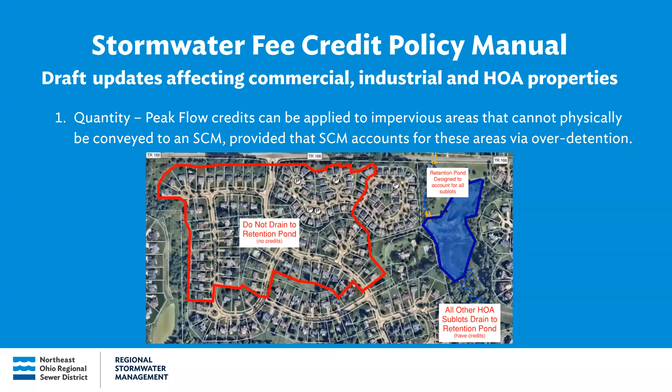So this is a little bit of a change here, but we want to acknowledge those that are paying into the maintenance of that stormwater control measure, just trying to give folks some more credits as they pertain to them.

All right, another update that we have. So currently we have industrial NPDES quality credit that allows companies to get a 25% credit for complying with their permit. We will be copying that program over to service municipalities that have MS4 NPDES permits.

So currently public buildings like city hall, service yards, police stations are exempt from the stormwater fee, but there are some self-sustaining building uses such as pools, municipally owned daycares, or rec centers where they are not exempt from the fee. So what we're looking to do is make those uses eligible for the quality credit, through the MS4 NPDES permit.

So if you have any questions about this or any of the other changes, please reach out to Chris Hartman. He'll be able to address those questions.

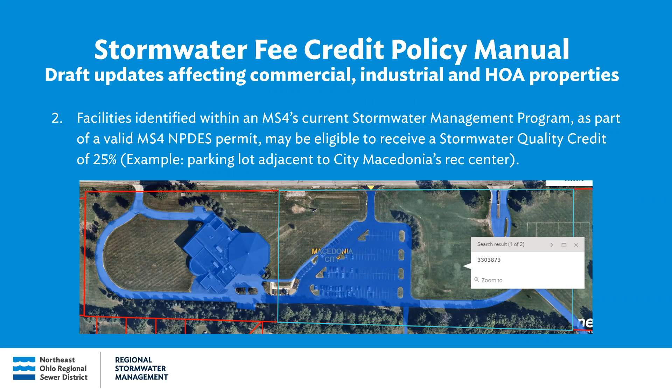So just a couple of other updates to the policy. Credit eligibility will require an applicant to at least have partial or shared maintenance responsibilities for an SCM. This wasn't the case before, but we wanted them to have some skin in the game, if you will. So we're going to require that partial or shared maintenance for the stormwater control measure.

We are also going to be adding an expedited credit application process for stormwater control measures that are funded through the Green Infrastructure Grant Program, just trying to speed up that process as they're submitting a lot of that information through the grant program already.

Credit renewals. So we're going to limit the dates on some of the credit renewals from May 1st through December 1st to ensure that SCM inspections can be completed during favorable weather. We don't want an inspection to come due in January when it's snow covered and we can't really see how that stormwater control measure is functioning. So we're going to try to align those with better weather for those inspections.

And then there's various administrative updates to provide additional clarification for those that are reading the manual. If you have any questions on any of these changes, feel free to reach out to me, your other watershed team leaders, or Chris Hartman.

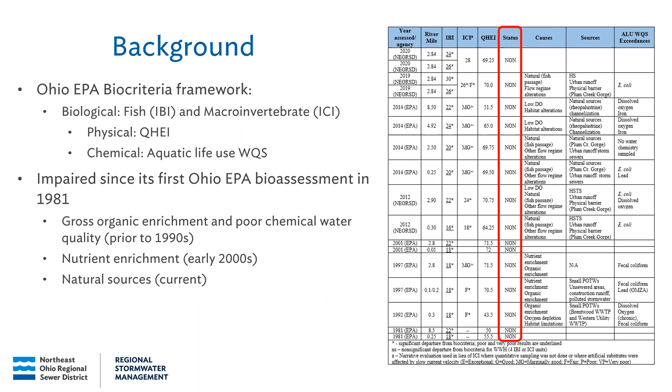So how do we get all that cleaned up in Plum Creek watershed? Well, the organic enrichment portion was really taken care of in large part due to the sewer district. In 1983, we started planning our Southwest Interceptor expansion, which is a really large sanitary sewer. It collects all the local sanitary sewers and brings them over to our southerly wastewater plant in Cuyahoga Heights.

So when that Southwest Interceptor finally went online in 1997, it took 3 wastewater treatment plants out of commission: the Brentwood, the Western Utility, and ODOT Park 339, a total of over 500,000 gallons a day of treated wastewater, which really wasn't treated very well. Now it's out of the watershed completely.

There's currently 1 wastewater plant remaining, which is the Plum Creek wastewater treatment plant, which has an average design flow of 0.04 million gallons a day. For comparison, our southerly wastewater treatment plant averages over 100 million gallons a day. The nutrient enrichment portion of the impairment was really taken care of by Ohio EPA and partners.

So when a stream is impaired for nutrient enrichment, Ohio EPA creates a total maximum daily load, or TMDL, for Plum Creek specifically in 2001. What that did is it made the Plum Creek wastewater treatment plant report their nutrient effluent, what's coming out of their wastewater plant, and put limits on them. In 2019 and 2020, monitoring by the sewer district showed that Plum Creek is now meeting all of those total maximum daily load target criteria that Ohio EPA put in place back in 2001.

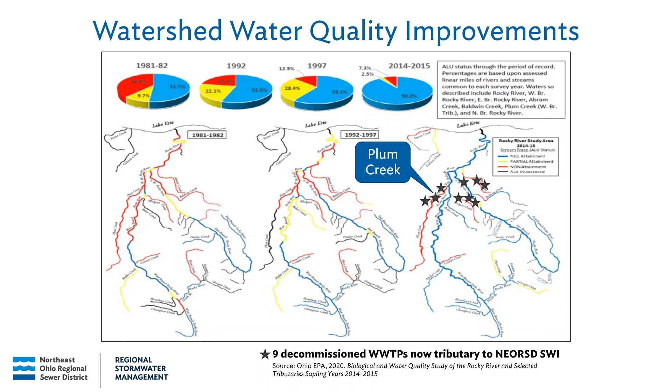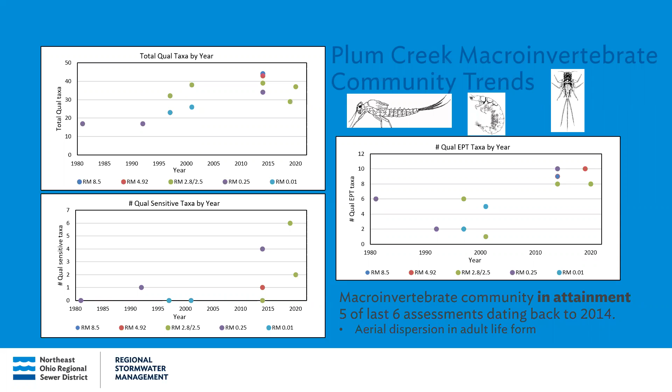Now, the second half of that water quality standards is the fish community. Fish are a little different than bugs.

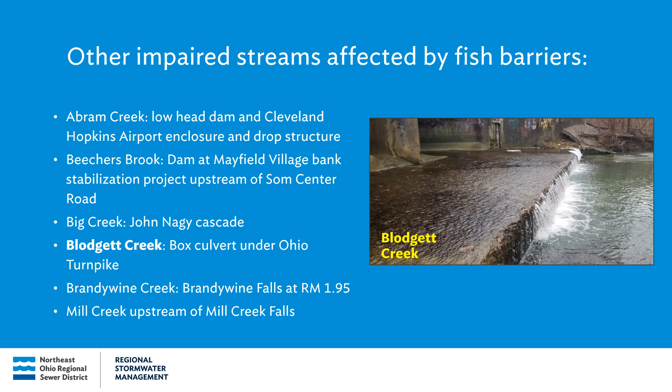I do not see any posted. All right, thank you, Keith.

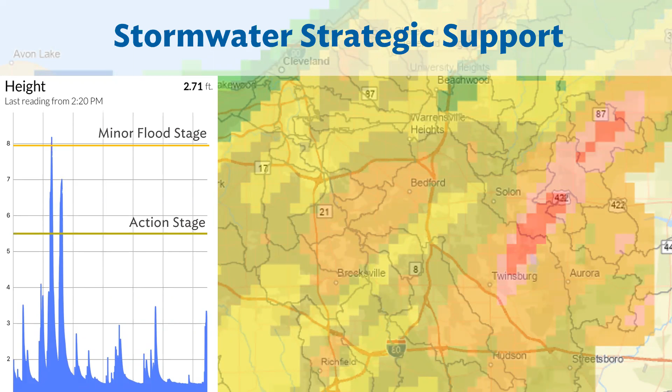So you've heard us talk about in other WAC presentations some of the steps that we take as part of our urgent storm event response. Related to the different types of data, we have an array of data types that we use, and we'll be talking about those here in the remainder of this presentation. First one is obviously rainfall. We have two different types: rain gauges — our district rain gauges and other rain gauges — and then our gauge-adjusted radar rainfall, which covers not only the area in our stormwater service area, but what also drains into it. We'll be talking about that as well.

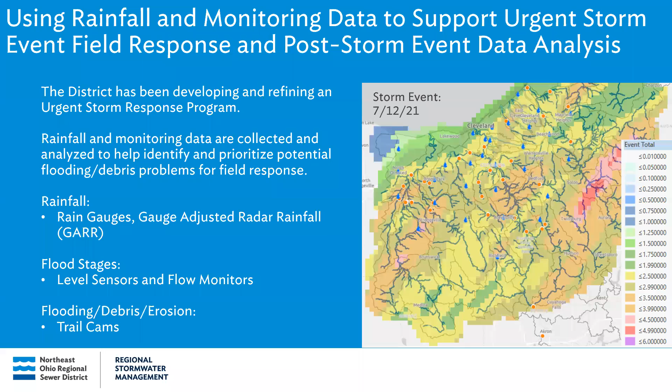A number of different level sensors and flow monitors that we have, both from the USGS, our district, and then an external vendor that supports us as well. And then we also have a series of trail cams that collect photos that we can turn into videos to support us with both debris, flooding, and erosion. Next slide.

With the district gauges, we now officially have 30 district rain gauges scattered throughout our service area. We collect 5-minute data time steps of rainfall amounts, and we've created a tool to quickly extract that data and summarize the peak rainfall amounts for a series of durations, ranging from 5-minute to 48-hour.

We then compare that to a couple of different reference recurrence interval sources. The first was the Huff and Angel Rainfall Frequency Atlas of the Midwest, which prepared recurrence intervals between the 2-month and the 100-year. The more recent NOAA Atlas 14 has recurrence intervals from 1 year to 1,000 year.

The example on the left shows a table of the 30 different rain gauges and the peak rainfall totals generated, compared to those different sources. For example, the bottom rain gauge from Westlake had relatively mild peak rainfall amounts, meaning a small intensity storm event between 5-minute and 1-hour. But for the larger period, the peak 12-hour and 24-hour met the 5-year recurrence interval, indicating heavier rainfall.

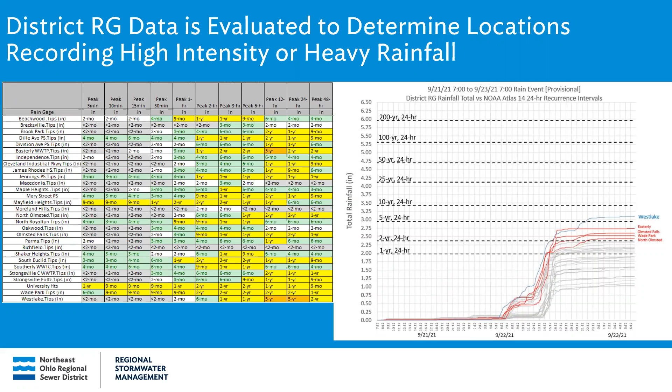Similar to the district rain gauge data, since mid-2016 we've been collecting gauge-adjusted radar rainfall data, or GARR data. It covers a little over 1,300 square miles, broken into 1 kilometer by 1 kilometer grids, translating into 3,410 grids, collecting similar 5-minute time step data.

We use that data similar to the district rain gauges, compiling it and looking at peak rainfall amounts to get a sense of what kind of storm occurred where, helping us identify high intensity heavy rainfall events.

This is an example of the July 12th, 2021 event, showing the peak 30-minute rainfall totals for the service area. The orange areas indicate heavier rainfall, darker green is lighter, and clear areas didn't meet the 2-month metric.

There's an example on the far left where some orange grids happen to be in Plum Creek, the same sub-watershed Justin told you about, indicating high intensity rainfall amounts. It just so happens we have a USGS stream monitor there on Plum Creek, shown in the upper left figure, and the levels actually met flood stage, which we then used to send out a field crew to assess the flooding situation.

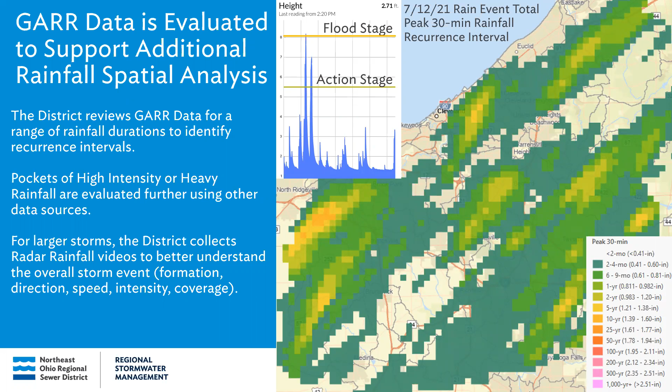Regarding monitoring data, we have 80 different stream monitors located throughout the service area. About 40 of those are USGS stream monitors, and we also have some district monitors installed, along with an outside vendor that's also been installing a couple dozen monitors throughout our service area.

For each of those, if we can, we take a look at the online data to understand where we have flooding and use those flooding indicators to send field crews to assess the situation. Based on the severity of the flooding, we might prioritize where we would go first versus other locations.

One thing I really like is how the National Weather Service has defined 4 different types of flood stages, shown on the bottom left: action, minor flooding, moderate flooding, and major flooding. The action stage reflects when water has reached a stream where it's about to get out of its banks and access the floodplain. Minor flooding indicates perhaps a local road has been overtopped. Moderate flooding indicates some buildings have been inundated, as well as some roads. Major flooding indicates a significant area is now underwater with several buildings and several roads.

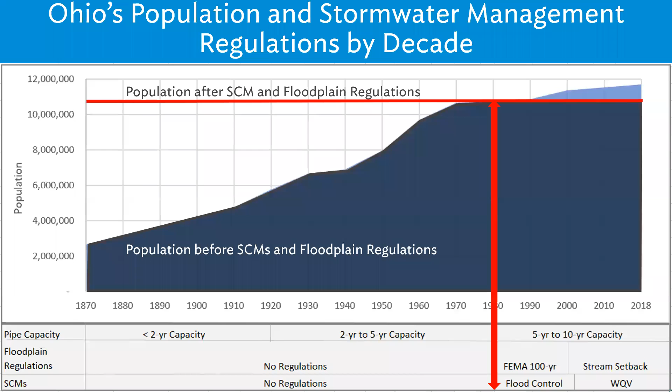So in order to support some of the analysis, the community originally had some locations that they wanted to put some detention basins and asked, as part of this request, how would this help mitigate some of the flooding in the area? And did the district have any other suggestions? And so based upon our existing model, where it loaded different catchments and what kind of pipes and streams were in the model, we realized we had to do a lot of additional extension into the local system. In order to understand those challenges with the storm sewers and the stormwater control measure potential locations, we decided to do a fairly significant extension in the local system. By doing that, it'll help us better understand these local flooding problems the community was trying to resolve, as well as some opportunities to mitigate those problems.

And so the table on your right gives you an idea of the number of model catchments the original model had, and with this update, how many additional model catchments we provided. So we went from 76 catchments to a little over 1,000. And the catchment size on average was 33 acres, which was actually a very good level of detail, but we extended it down to the catch basin level or the parcel level in the non-residential areas because of the types of solutions we thought would be most beneficial for this area. From a modeled conduit segment, we went from a little over 50,000 lineal feet of pipe modeled to nearly 250,000 lineal feet of pipe modeled. And to give an example of what that looks like, the next couple of slides can help explain that.

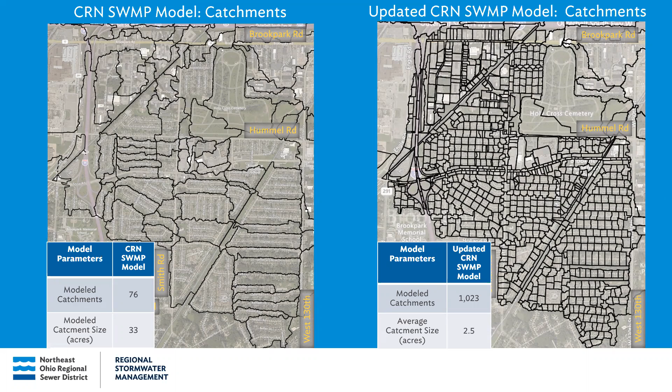And since the community had very good records of the different drawings, anytime we found any areas where it looked like we needed assistance, they were able to quickly find those and share those with us. So it was a very good coordination effort between us and the city to try and get all this information in. Next slide.

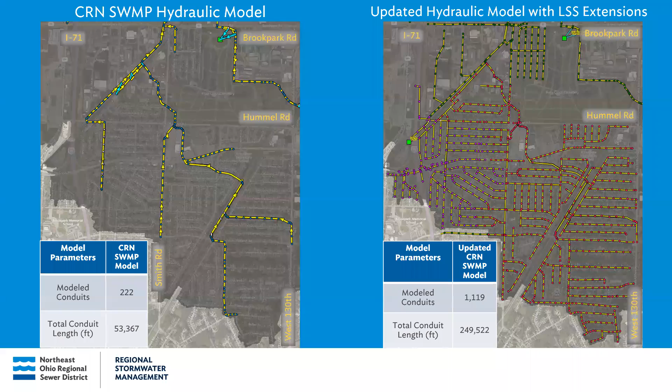So right now we have 3 different monitors that are currently located in this portion of the service area, collecting data and using both the district rain gauges and gauge adjusted radar rainfall data. We're currently nearing the end of our model calibration. And from that, we'll define the different problems and then different types of solutions.

And as I mentioned before, since this area was generally developed prior to stormwater control measures, with the challenges of this area being very flat, very impervious, and having poor drainage soils, it looks like the storage alternatives are going to be the most beneficial to this area. And there's 3 general types that we're looking at. The first one are some conventional inline basins, which are the ones you typically think of. But in order for those to have the best application, you need to have enough elevation so you can allow ponding without causing problems in the upstream areas.

Another option is the conventional offline basins, but in order to do that, you need to have enough area that you can divert the water from the streets and storm sewers. And once again, with a very developed area like this, there's limited areas where you can do that as well. And the one that seems to have the most application and probably the most benefit, but also might be the most complicated and costly, is decentralized underground storage or bioswales.

But with the imperviousness that we have and with the public right-of-ways that we have, it looks like these might have the best application. And once again, that's one of the reasons why we went to such a high level of detail. So as we proceed with these different alternatives, and we'll share these with the community, this might be a good thing to give you an update on at the next spring Watershed Advisory Committee. Next slide.

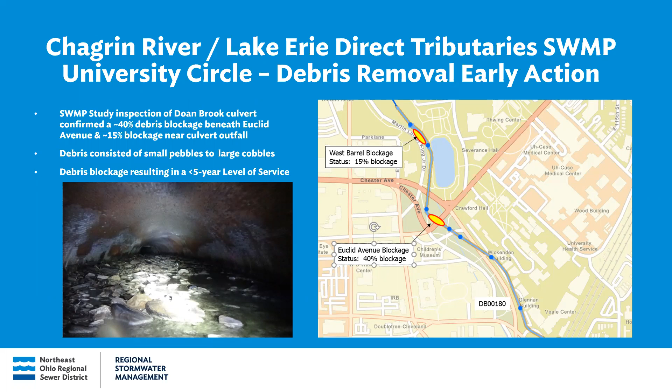As a result of these 2 blockages, we noted when we modeled this that we were only getting less than a 5-year level of service in the culvert. And you can see an example of the blockage in that lower left-hand image. If we go to the next slide, please.

So this next image shows you what we did afterwards. From December of 2020 to February of 2021, we hired a field crew to go into the culverts and remove this debris. And they wound up removing just under 2,000 cubic yards of material in these 2 blockage areas. As a result, we were able to increase the level of service in this part of the Doan Brook culvert underneath University Circle from less than a 5-year storm event up to a 10-year storm event. So we were really happy that we could increase the level of service in this highly urbanized and highly visited area of Cleveland, Ohio.

If you take a look at the image on the right there, you can see the extent and the degree of the flooding in this portion of University Circle before the 2 culverts were cleaned. And if we go to the next slide, you can see what it looks like once these 2 blockages were relieved. We were able to significantly reduce the amount of lateral flooding, and in particular, along Martin Luther King Drive near Case Western Reserve University, we were able to lower the height of the inundation as well.

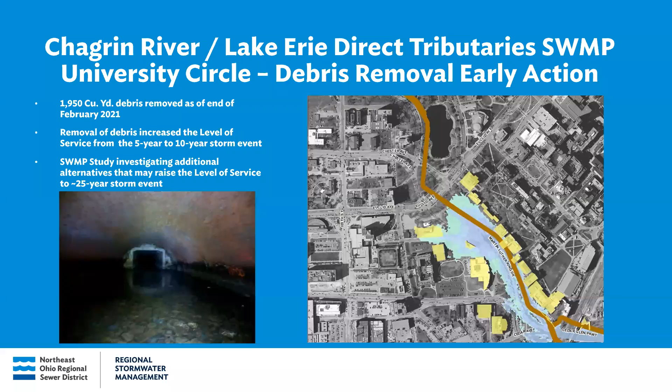So our next hope is that with the master plan being completed in this area, we've come up with an alternative that could possibly allow us to raise this level of service even further, from the 10-year storm event to the 25-year storm event, if we determine it's feasible to do this particular alternative. So if we go to the next slide, please.

Another example of the work we were doing early on while completing this master plan: we were approached by the village of Mayfield. They had a crossing at Worton Park Drive that was starting to fail, and they were planning on replacing this crossing, but since they knew we were doing the master plan, they asked us to take a quick look to determine the proper sizing of this culvert if they were to replace it.

They didn't want to replace it with the same size if the master plan was later going to determine it should have been increased. So we decided to treat Beecher's Brook as our pilot study for the overall master plan. We went in, collected field data, did surveys, cross-sectional surveys of the creek, and got information on the condition of the culverts and crossings.

We modeled this portion of Beecher's Brook to size that culvert, and what we found is that this culvert was undersized in terms of high flows. So we made a recommendation to the village to increase the size of that culvert to help relieve flooding without introducing additional flooding downstream.

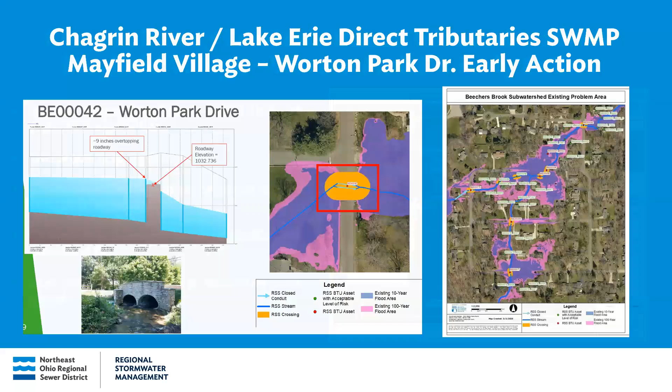As a result, we were able to recommend that the village replace that double-barrel culvert at Worton Park Drive with a 4-foot by 16-foot, rectangular box, which would address their concerns and allow them to replace that culvert. Looking further upstream, we identified two areas where property acquisitions would be favorable, allowing us to expand the floodplain, add storage, slow down flows through the neighborhood, and make channel improvements in this portion of Beecher's Brook.

So we've come up with this alternative. The village has already informed us that they want to move ahead not only with the improvement to the Worton Park culvert, but also with improving the culvert up at North Woodland Drive. We're already taking our master plan findings and working with the city to address some of these issues early on, even before the master plan is completed. This was a nice collaboration between us and the city, and we're looking forward to moving ahead with this project. Next slide, please.

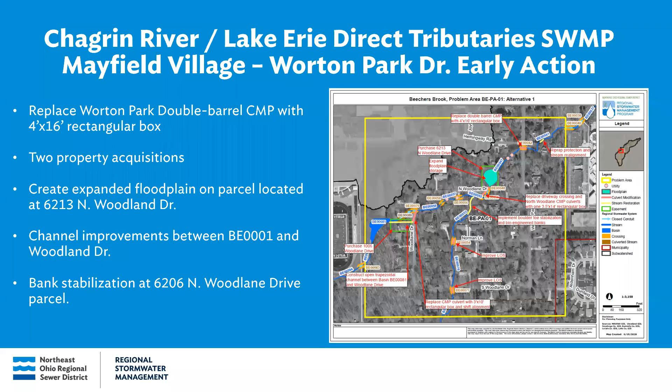Where we'll go next with this master plan is that once the reports are in, we'll take a look at all the preferred alternatives recommended by the consultant. We'll start the nomination process, getting these validated with our other divisions, and then start scoring and prioritizing the various alternatives so we can get them into design and eventually into construction. So if we can go to the next slide.

Now, some of the alternatives we've already noted in the Chagrin River and Lake Erie direct tributaries turned out to be very large projects, either with large complexity, involving a large number of building, transportation, or utility assets impacted, or with a huge cost associated with them, making it sensible to take these to advanced planning. When we take these to advanced planning, we're trying to take these potentially cost-prohibitive projects and break them down into manageable projects that can be phased over time and completed.

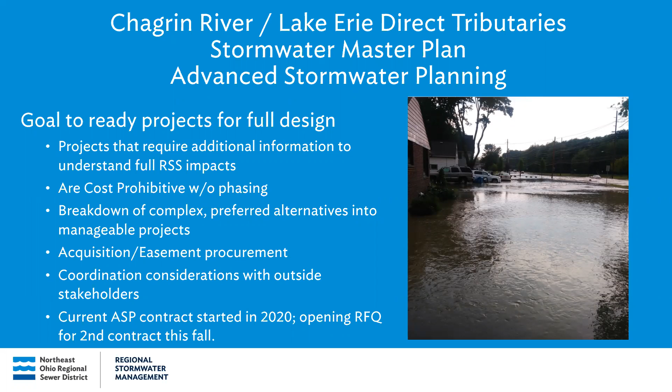Alrighty, if we go to the next slide, please.

I've brought this up in previous WAC meetings, but I want to reiterate that as we've done these master plans, especially with the Chagrin River and Lake Erie Direct Tributaries project, we've collected a lot of data that we think would be valuable to you. George mentioned that we've modeled each of these subwatersheds, and those models are living documents available to you upon request.

We'd like to work with you so we can maintain those as living documents and update them as needed. We also have information about all the culverted streams, video of our inspections of all the crossings and bridges, and spherical imagery—basically the Google Street View of all the watersheds—that we'd be happy to make available to you.

In summary, at this point we're nearing the end of the master plan in this study area. We expect to have the reports done by the end of November, possibly early December. Once we have these reports and the community reports done, I'll be working with Jeff to meet with each of the communities, show you the results of the master plan, the preferred alternatives, and start talking about next steps for your communities.

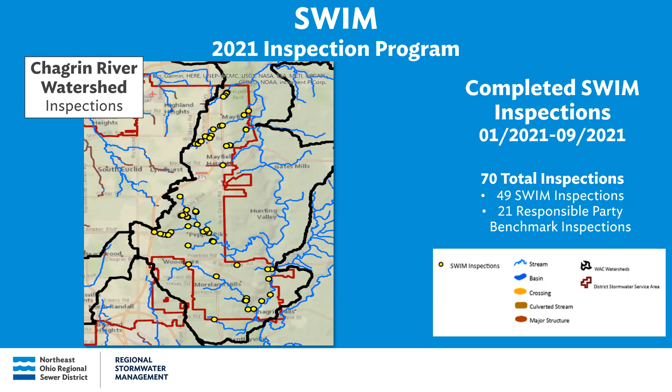Recently we've shifted our focus toward culvert inspections in the Chagrin watersheds with those stormwater master plans coming in, and some of you have probably received some of our inspection reports. SWIM staff has performed culvert entries, and we also utilize the stormwater master plan PACP reports and CCTV footage to speed up our inspection process. These culvert inspections help us inform and prioritize the culverts most in need of maintenance and repairs, prioritized based on material deterioration and potential threats to nearby infrastructure.

The example featured in the photos is a culvert parallel to Cedar Road in Beachwood. It's a CMP culvert that was previously lined, but the bituminous coating has deteriorated along the invert, exposing the corrugated metal with perforations. There were also local tap break-ins that were defective, with soil visible behind them and voids. This was rated a 4A ODOT, which is considered poor condition.

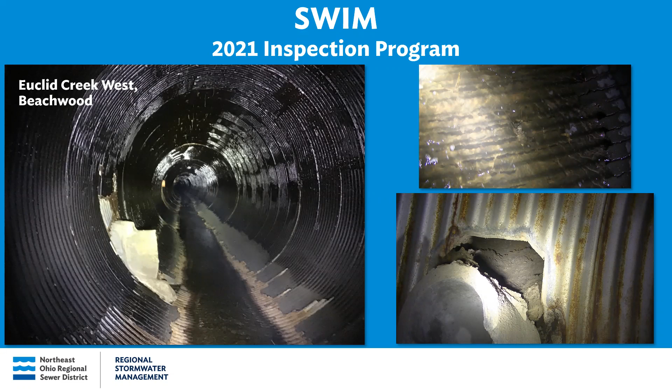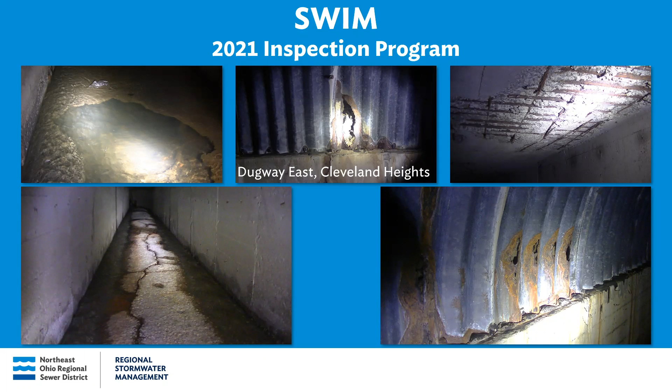Another example we have is a culvert in Cleveland Heights. This inlet's behind Cumberland Pool and outlets behind the rec center. The downstream section was previously repaired due to a partial collapse in May of 2018 behind the rec center. This culvert is a concrete box that transitions to a corrugated metal pipe arch with a paved invert. The concrete along the invert has fractures and uplift, and there are also large holes allowing water to infiltrate. There was also spalling with surface reinforcement visible at the crown, and the downstream section has perforations with soil visible in the corrugated metal. So this one was also rated a 4A based on ODOT standards, which is poor condition.

Now I'm going to quickly discuss the maintenance we've performed this year. In the Lake Erie Tribs, we've completed 30 sediment and debris projects, removing 739 cubic yards of debris and 20 cubic yards of sediment. We completed 2 other projects, which included tree removal and some concrete patchwork on the U.S. Army Corps flood control channel in Cleveland.

In the Chagrin River watershed, we've completed 3 sediment and debris projects, removing a total of 105 cubic yards of debris, and we completed 1 demolition project on Gates Mills Boulevard.

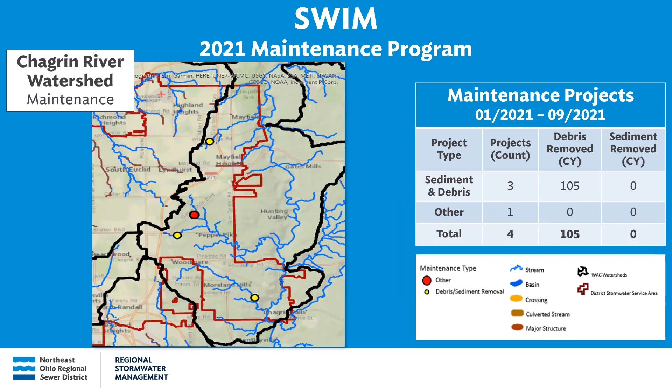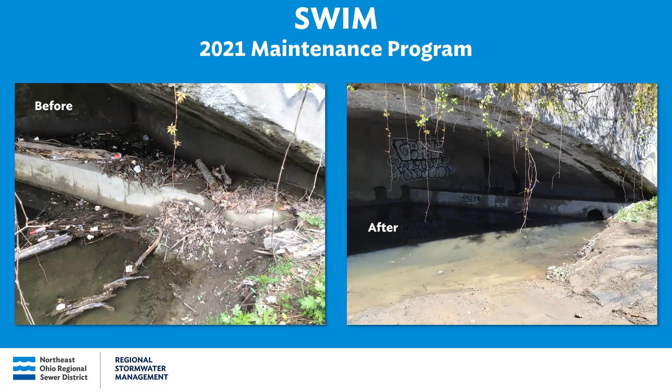This is an example of some debris that was removed from the 9 Mile Creek siphon in Bratenahl after a larger rain event. We perform debris checks at the siphon and our debris racks quarterly and after large rain events to evaluate maintenance needs.

Here's another example. This is the U.S. Army Corps concrete flood control channel along Euclid Creek in Cleveland. A customer called us about trees that came down in the channel, and we went out and removed a total of 40 cubic yards of debris.

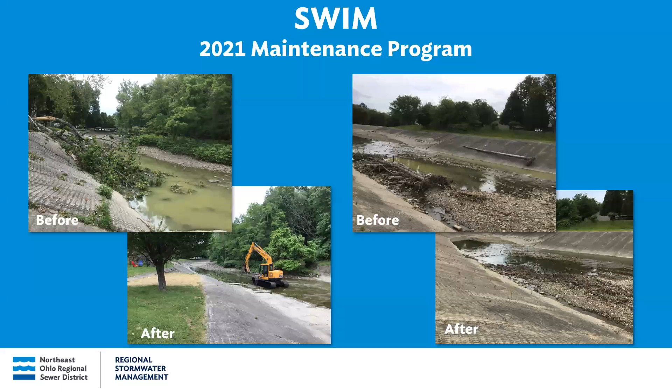Now I'm going to discuss our demolition services. Property acquisition is a critical part of implementing stormwater projects for the district's regional stormwater management program. Most of the acquired properties are occupied by existing buildings and other infrastructure, which are required to be demolished prior to implementing a stormwater project.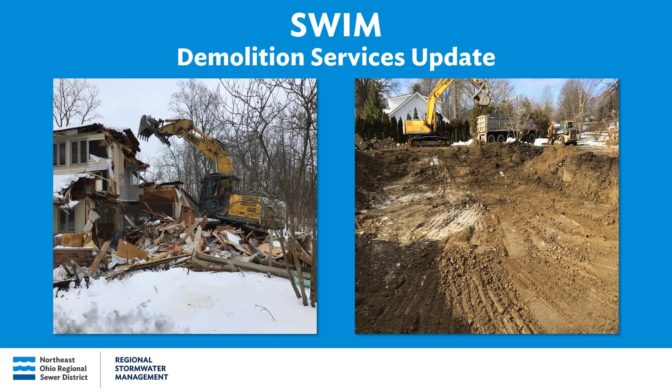At the start of the stormwater management program, demolition services were contracted out, and the Cuyahoga County Land Bank had previously handled our demos. But in 2020, the SWIM group took over the property acquisition demolition program, and a contracting program was developed for asbestos survey, abatement, and property demolition services. This photo shows a home that was demolished in Pepper Pike on Gates Mills Boulevard.

The asbestos survey and demolition contracts were awarded this year and began in the spring. Removal has been prioritized based on how long the site has been vacant and project timelines. This photo shows the recent demolition of a home on Forest Overlook Drive in Seven Hills, which was close to an eroding stream bank and is part of a planned construction project. The home foundation and driveway were removed and the site was graded and reseeded. So far this year, 4 homes have been demolished and 3 are currently in the process of being removed.

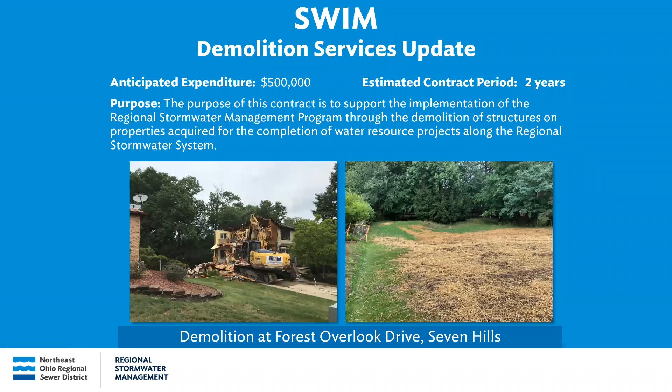So if anyone has any questions, I'll take those now. And if not, I'll hand it over to Tony Calvledge, the stormwater construction manager. I think you're good, Andy. Any questions? Great, thanks, Annie.

Like Annie said, I'm Tony Calvledge, a stormwater construction manager. We're going to give you an overview of what we're working on stormwater design and construction wise. First, we'll talk about the design component we're undertaking.

The Baldwin Creek Relief Culvert at Stormes Drive. This is in Parma. There's a basin upstream of this that needs better conveyance through it. So we're entertaining putting a relief culvert down Stormes Drive, which should increase the conveyance. We're also looking in the future to do a basin expansion project there also. Residents of that neighborhood should be able to realize some flood risk mitigation because of this effort.

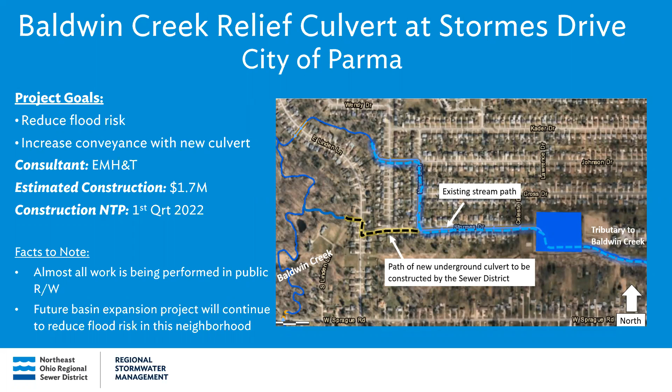Big Creek flood reduction. This is near Sprague Road in North Royalton and Parma. There's an undersized culvert, which is the top right picture—you can see the small culvert. So we're going to upsize that culvert underneath Sprague Road. Two residential structures were previously demolished on this parcel, and now we're going to create a more naturalized stream channel through this area with floodplain access. That should really be a benefit to this flow area.

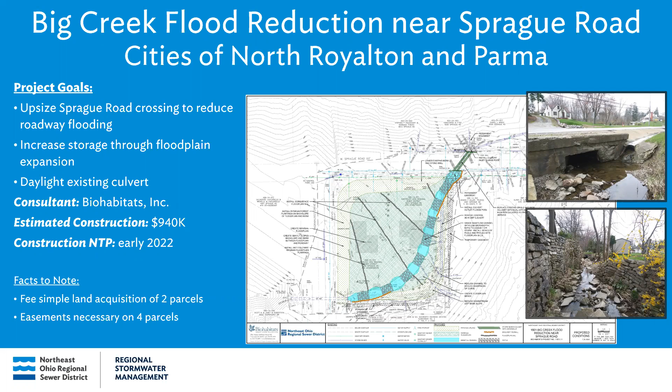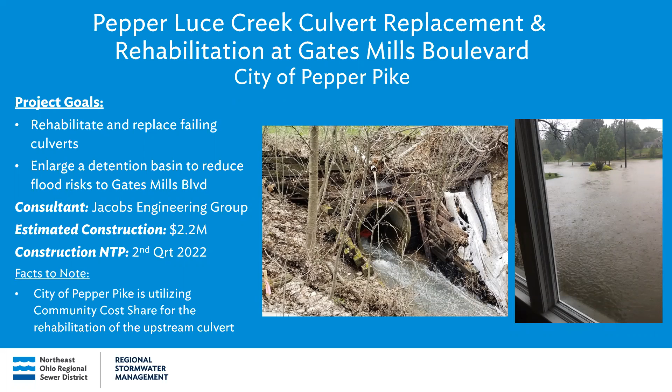A similar story here at Pepper Luce Creek, culvert replacements and rehabilitations. This is Gates Mills Boulevard in the city of Pepper Pike. We've got undersized culverts, failing culverts, causing road flooding—you can see in the picture on the right. So this will be a definite benefit to this area also.

Similar to that, here we see a long list of culverts that need rehabilitation throughout the service area. We're trying to associate $1.5 million annually to rehab these assets. We're looking at rehab procedures, daylighting procedures, anything we can do to maintain our underground infrastructure beneath the city, to make sure the public isn't affected by failures or flooding caused by these culverts and their deterioration.

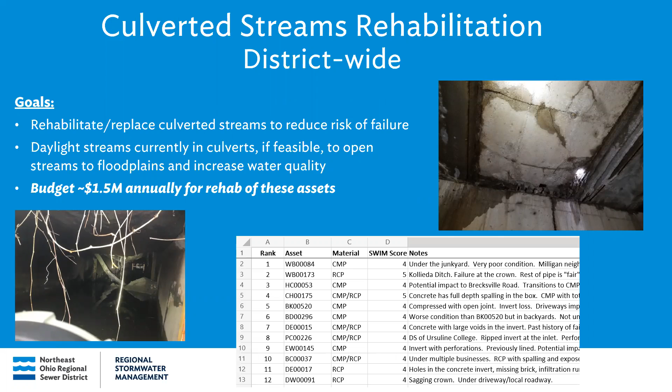Next, we'll talk about construction. This is a recently finished project at the Rocky River, in North Royalton, right at Ridge Road. The before picture on the left-hand side shows this stream flow up against the road with a failing guardrail. A typical fix for this would be to drive some sheet pile next to the road to protect it from the stream flows and its erosion.

We've taken an alternative approach here. We've moved the stream away from the road, giving it room to flow and flood and do what it needs to do—room to breathe, per se. If we keep these two utilities separate—the road conveying traffic and the stream conveying storm flows—both are needed, but both need their own space. So both should be able to live harmoniously together in this newly created space.